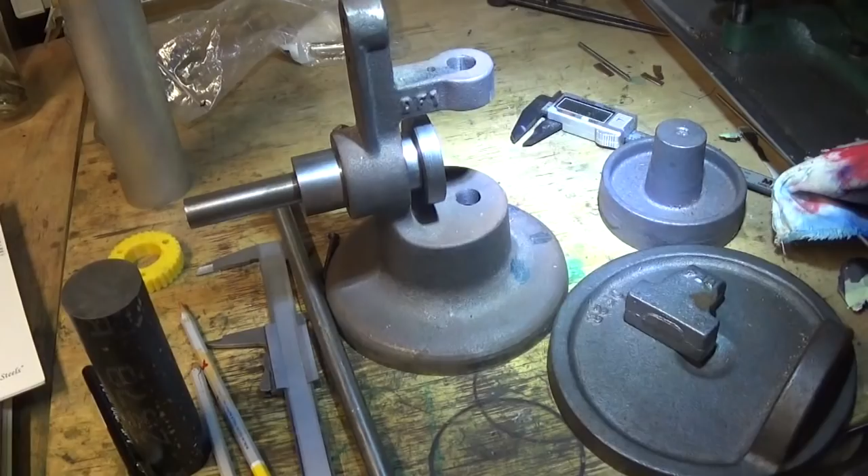This is sort of one of those excuse videos. It's really only an answer to Chirpy's video posted today.

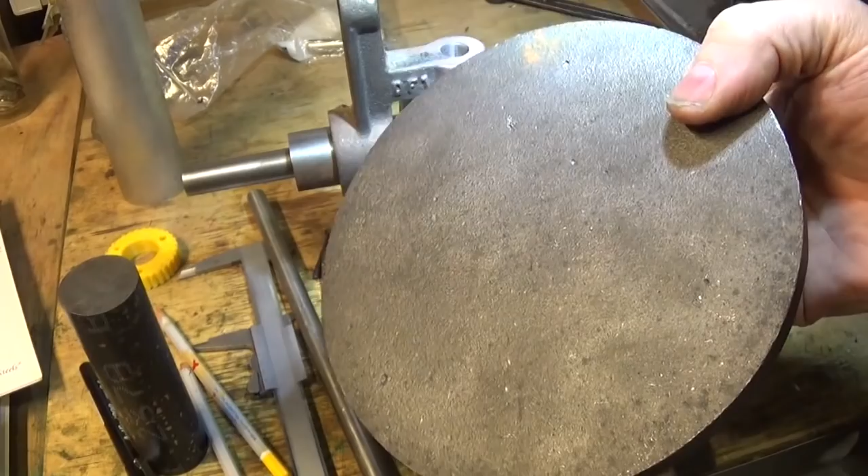This is the table. I don't have a lathe big enough to turn this, and I don't have a shaper big enough to cut it. I don't have a milling machine big enough to cut the top of it. So at this point we're looking for another option, and probably I'm going to go to a friend's place and set this up and machine it. It's probably the only real way I can see to do it after I've machined this here and put the groove in it for the adjustment and everything.

I don't know if it's particularly well designed, to be honest, just like that. I'd be interested to see what anyone else has done. This table sits on here. I might move this up a bit so you can see. This table sits on here with a hole in it. It's quite a solid bit of cast iron. To be honest, 3/16 steel plate would be a better job probably, but we might persevere with that.

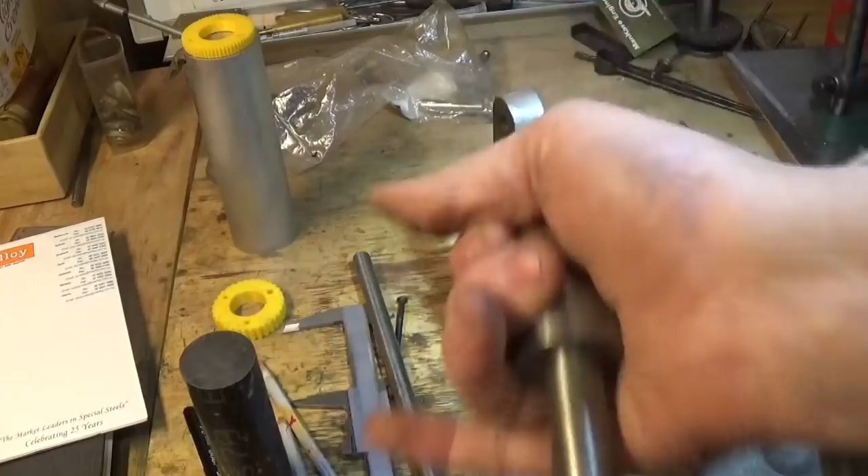This is basically machined. I come up against not having a long enough drill, which I've actually bought a long drill to do that. So it's a matter of drilling and tapping that and putting grub screws in each one to hold this bush, which is adjustable. I may have been adjusting this reamer when I reamed this and discovered that one blade had fallen out when I got it to final size. So these bushes aren't real good.

It's better than I sort of remember, but it does have a bit of a chop in it. It's a bit crunchy. It's sort of got an 8-sided hole in there. So really it needs a couple of new bushes. It's not a big job to put brass bushes back in there. The heat gets hot enough to knock those out, so the Loctite lets go, and put new brass bushes in there.

This is adjustable here with a couple of grub screws, and that gives us our depth here on the Scotch yoke, which is this piece that goes up and down there. And it's got a pin on it that works on the slide here.

And it's got two bushes, top and bottom, which are little top hat bushes. They're pretty straightforward. And it's got a 7/16 rod, which is a little bit smaller than this, goes in and out there. And this clamps on it. And it's got a fitting on here for a file. And it's got a pulley on the other end. So there's not much to it.

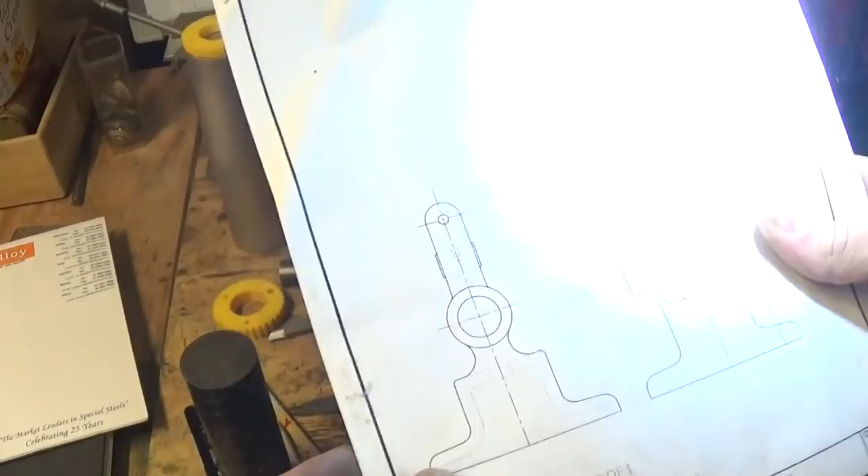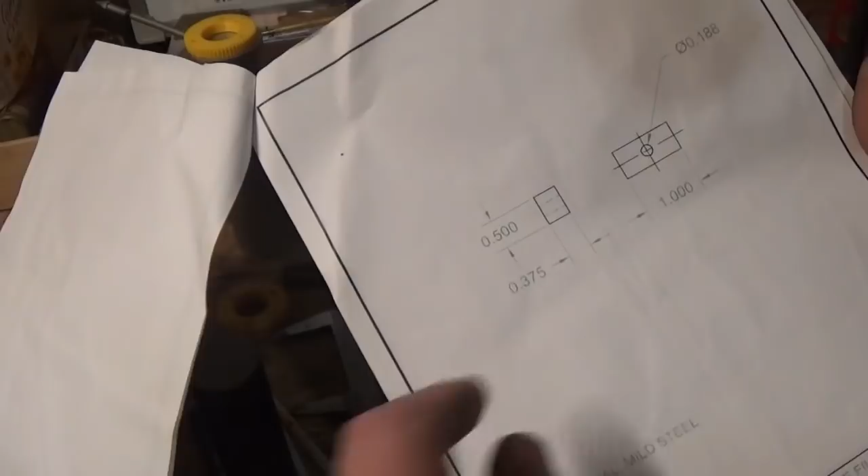These are the drawings. Don't know if you can see that. I'll turn this light off, it might be clearer. There we go. That's the base, which we're sort of half done, and the pulley and the little Scotch yoke piece and the pin and the slider block, which goes on the pin and slides along the slot.

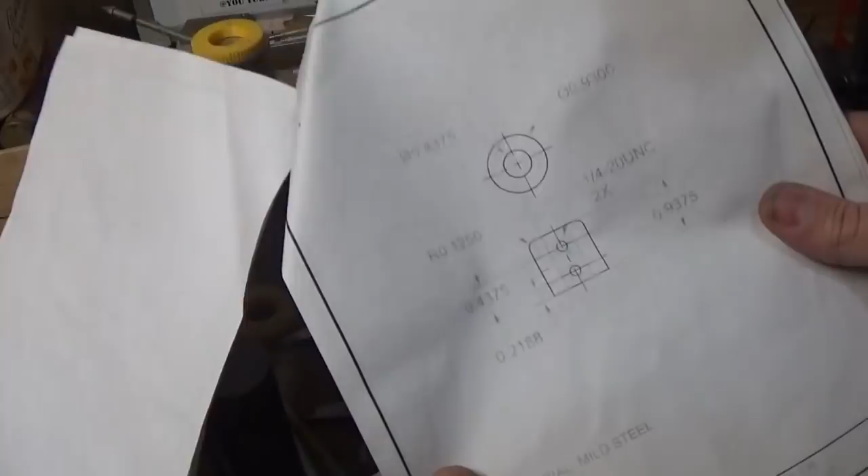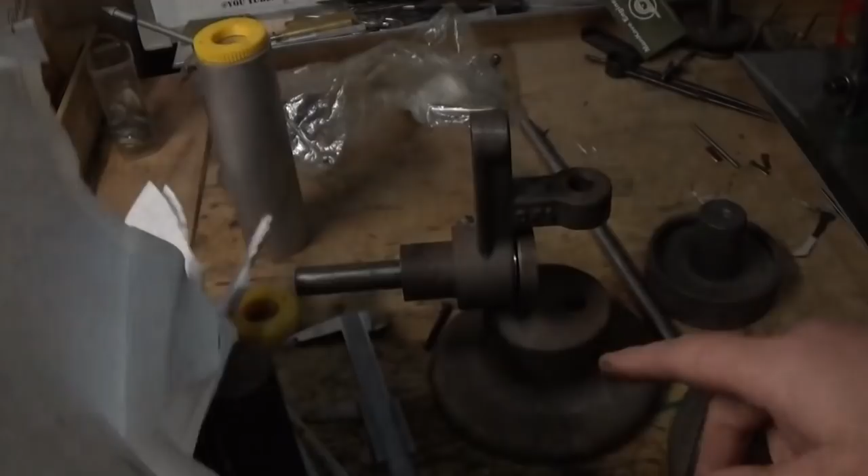And the shaft that goes up and down, which is 7/16 and about 6.5 inches long. There's a collar that retains the files, and the bushing, which I've already made. There's a little swarf guard that goes over the top to keep the dust out of the mechanism.

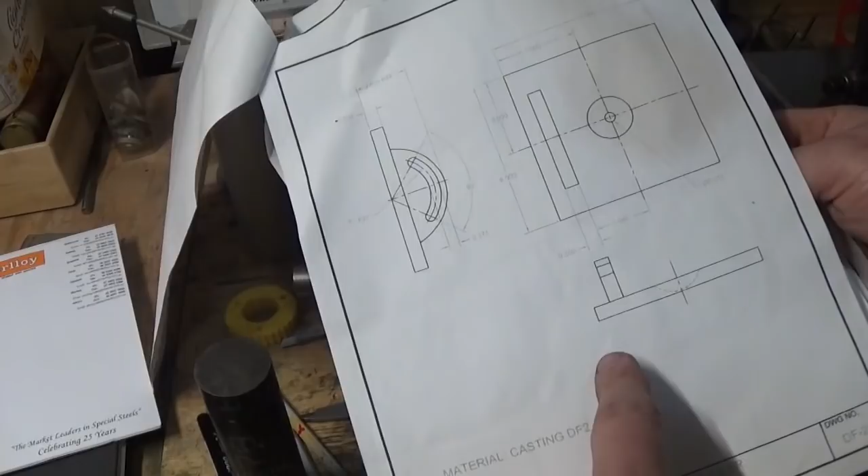And we seem to be missing a drawing with a table on it for some reason. Oh, there's a square table. There should be a round table drawing as well. But anyway, this was available with a square or a round table, and to be honest, the square table might have been a better option. But I chose the round one. It's about 6 inches diameter and it's pretty heavy. So this whole thing in cast iron is pretty solid.

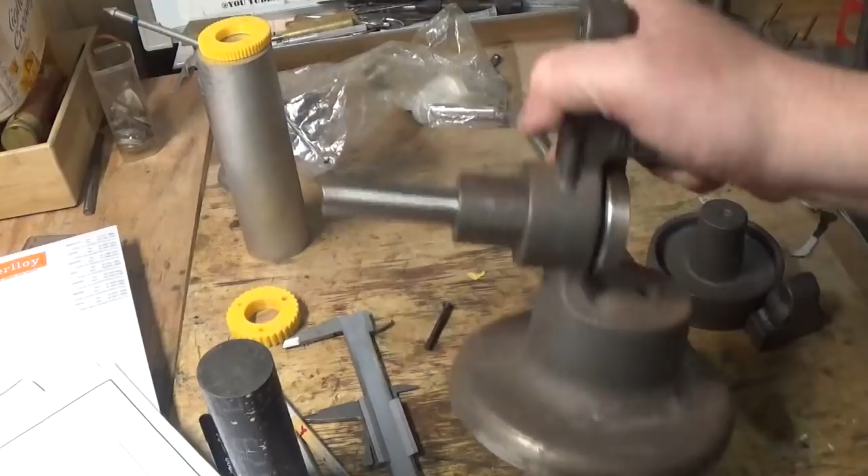Martin Models supplied this one. It needs a bit of a clean up and putting together, and a stand made for an electric motor. But that's as far as I've got to, Chirpy. So you might have persuaded me or got me interested enough to get out and have a go at this again this year. There's probably not a whole lot to getting it finished.

This is quite a basic part with the horizontal mill. It's very easy to do. This is just a pulley. That's very easy. It's not a huge deal with a crown on it. We need to fix these bushes.

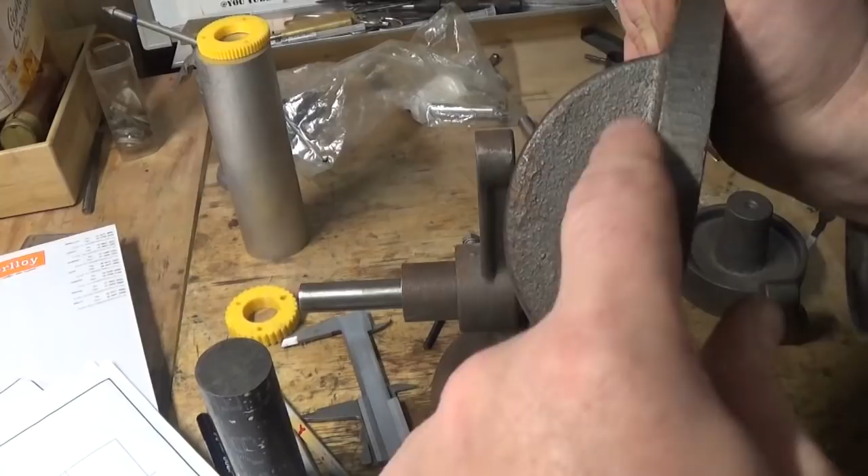The biggest issue is the table and the way the table works and the locking system on it. The way it's drawn, it's got a groove in here, which probably, I guess, has got to be done on a rotary table with an angle plate. It's sort of an awkward thing. Whether I do that or whether I just put a row of holes, or whether I chop this off and put an angle piece, like a decent piece of angle or something like that in there instead. Really not sure yet, but I might leave this on the bench or somewhere close by and we'll have another look at it soon. So that's all there is for tonight.

I'm working all weekend. You may or may not get another video. I'm working on bits for the traction engine, and I'm working on the shaper bits for the clapper box. I'm also working on a boring bar or a boring bar holder for the multi-fix tool post, and I'm working on my little pantograph engraver. So these are all things that are happening, and I'm waiting for bits for all of them, so that's not much progress this weekend. So there you go.